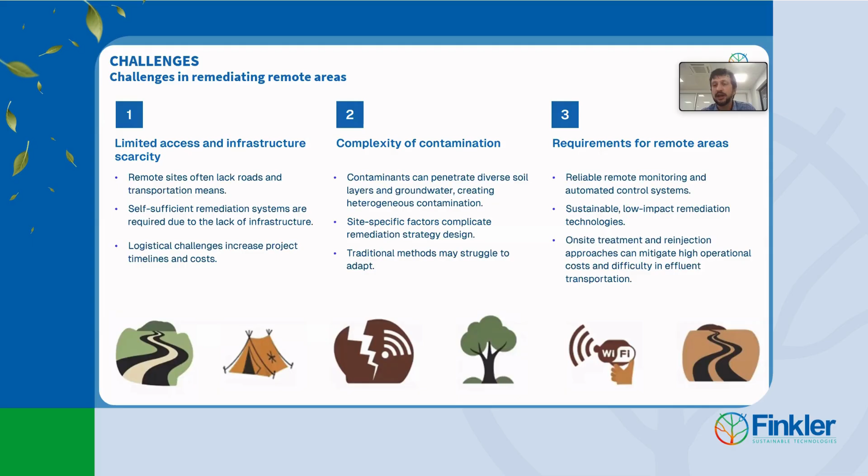Now, every time we head to the field, we have a well-established and technically based field plan. But it's very common for field conditions to demand specific changes or adaptations. Now, in this sort of context, traditional remediation systems require intensive physical presence to enable these specific adjustments. So monitoring and automation, as well as the incorporation of different remediation techniques, can help us optimize the remediation efforts. I know that these aspects are important to all remediation sites, but specifically for remote areas, they have a larger operational and financial impact.

So what are the key factors of our implemented system? Well, automation is a key factor in remote areas. It enables us to continuously operate without having to have a physical presence in the site. It also enables optimized pump performance and can remotely adapt to some extent to changing site conditions in real time.

We also implement solar power with auxiliary power generators. This enables us to have power supply flexibility. Now, the specific capacity of each component will vary according to site specifications. Factors like predicted operation period and distance to resources are taken into account for us to balance implementation efforts and operational optimization. In this sort of context, reduced footprint is also very important, as this reduced footprint will help us reduce the implementation time and costs.

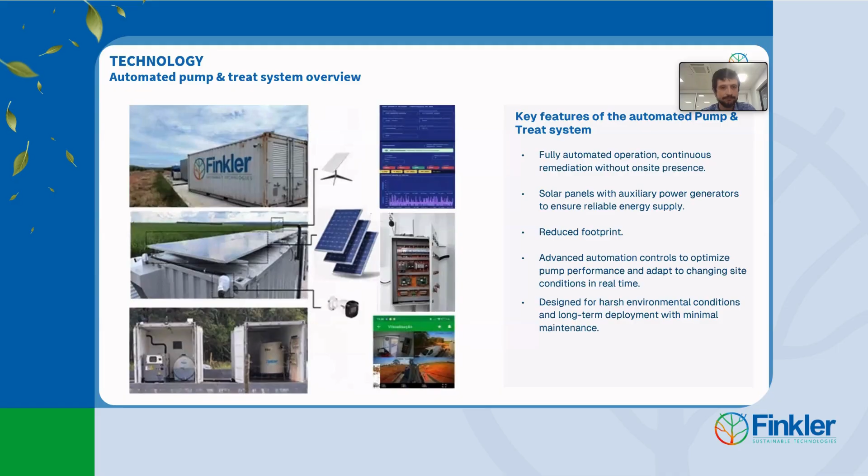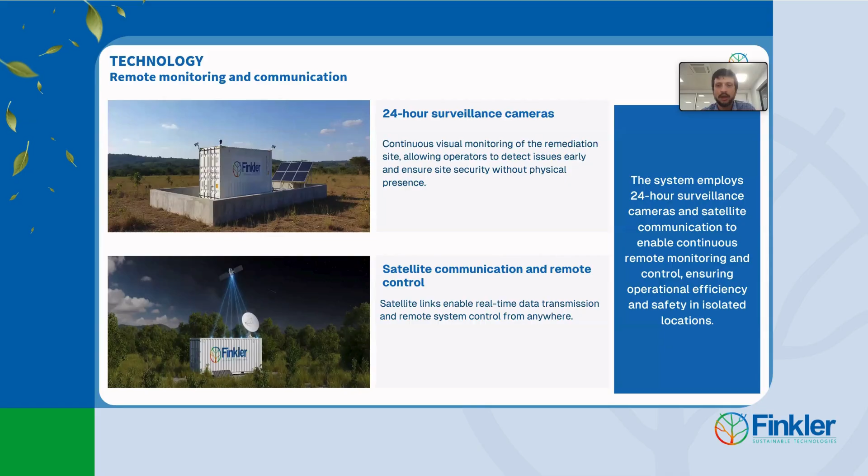Finally, the system that is projected has to be designed to withstand harsh environmental conditions. We often encounter high volumes of rain, elevated temperatures, and high incidence of atmospheric discharges. So in this context, a robust, well-designed system will help us minimize the maintenance requirements. In this sort of project, surveillance cameras and satellite connection must be applied. The cameras enhance security and provide site condition monitoring, and satellite connection enables reliable communication and control, which are utmost requirements for remote operation.

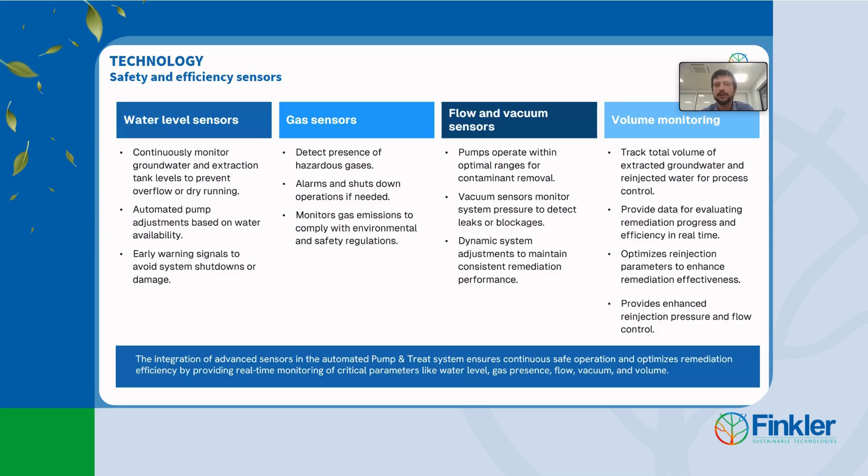So we apply a series of sensors to support these remote operations. We use water level sensors to monitor groundwater and tank levels. This enables us to do pump adjustments and avoid shutdowns and damages. We utilize gas sensors that allow for safe operation and regulatory compliance. We use flow and vacuum sensors, which enable adjustments to maintain optimal pump performance and consistent remediation performance. These sensors also detect potential leaks and blockages within our lines. Finally, volume monitoring provides a progress evaluation and can potentially provide data for reinjection planning.

So in this kind of context, reinjection is a technique that is very important to reduce the movement, the transportation, and the destination of the effluent that is removed. But it presents specific challenges. It must be done very carefully. Pressure and flow rates must be rigorously controlled to prevent uneven flow distribution and formation damage.

Now, there are two main ways we can reinject this effluent. We can do it through a natural flow or through mechanical pumping. Well, natural flow will provide us with a slower flow, and the infiltration path will usually follow a natural site condition, making it difficult to reach specific layers. As for mechanical pumping, it will provide higher control, but if not done properly, it can lead to the creation of preferential paths.

Reinjection also presents the challenge that many times a single extraction point may require several infiltration points to accommodate the removed volume. So site-specific conditions must be considered, and removed fluids may be reinjected partially and sometimes completely. This will very much depend on the reality we find within the field and the specifics of the contamination. So all these factors lead to high operational complexity, and great care must be taken to avoid unwanted contamination movement.

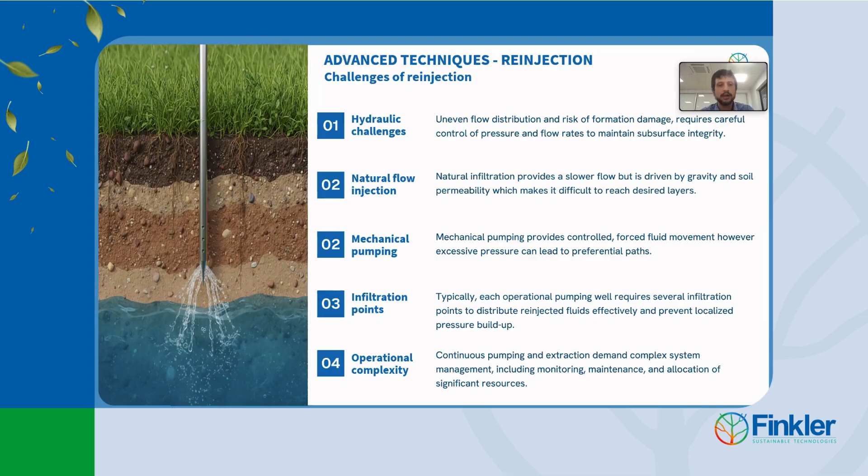So how can we optimize this reinjection? Well, we use forced reinjection. This helps overcome the hydraulic challenges and supports effective distribution. We utilize low pressure and controlled flow, mimicking in situ chemical oxidation techniques. This avoids compromising soil characteristics. We also use the reinjected fluids to establish recirculation by recovery pumping. This can drive contaminant mobilization and enhance the extraction efficiency. All these principles we can apply in either the vadose or the saturated zone.

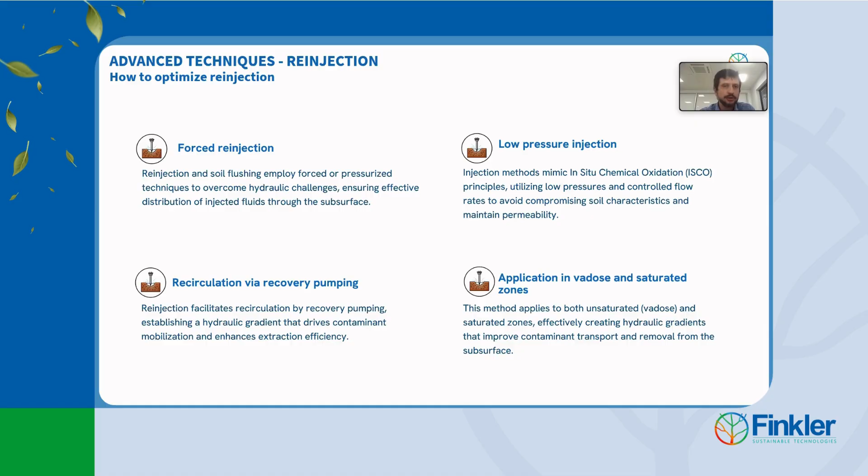So what we found out is that reinjection may be enhanced by combining biosurfactants or bioremediators in the fluids to be reinjected. But in this case, the proper distribution of the points, as well as the injection in the correct layers and the correct depths, are key to success. So optimal solutions vary depending on site characteristics.

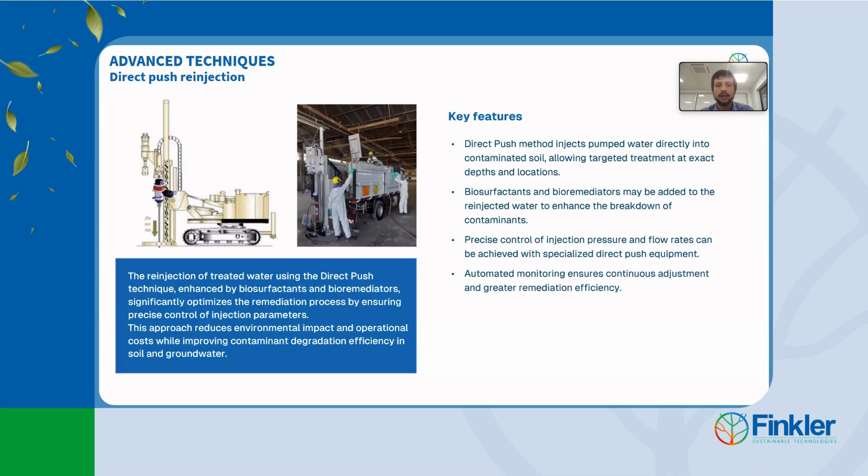We can apply two different formats. In a permanent format, probes can be driven down to the desired positions on the specific and appropriate layers and can sustain continuous reinjection. Alternatively, a batch system can be applied. In this case, effluent storage must be implemented to sustain desired intervals. And then periodically, we can mobilize an injection system that can reinject the stored fluid.

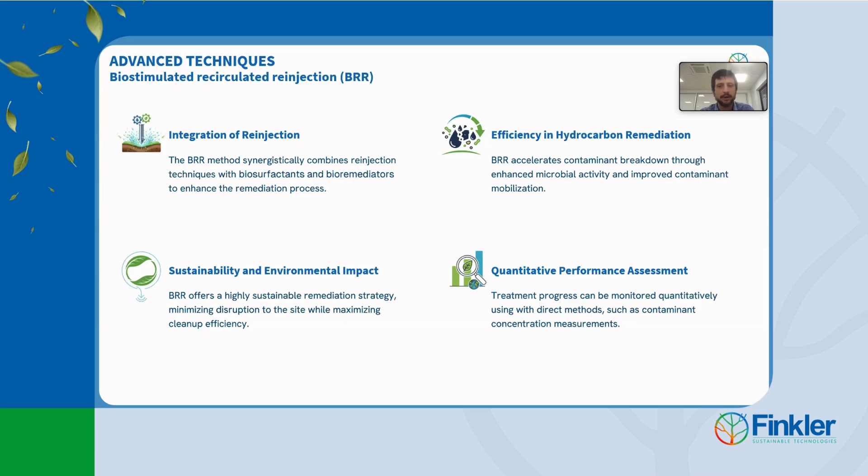So putting all these techniques together, we end up with a biostimulated recirculated reinjection. This combines reinjection with biosurfactants and bioremediation and can accelerate contaminant breakdown and improve contaminant mobilization. This is a sustainable remediation strategy and can maximize efficiency. And all these gains can be monitored through direct measurements of parameters such as contaminant concentrations.

So what are the benefits of this sort of composition? Well, we can reduce or eliminate effluent transportation, and this will lead to operational gains. It can minimize logistical challenges, reduce the reliance on external treatment facilities, and eliminate risks and emissions associated with effluent transportation. We can achieve lower carbon footprints. This is supported by the substitution of fuel by solar energy and the reduction of the requirements for on-site interventions. Additionally, the use of bioremediation may reduce the requirement for the application of chemicals.

Finally, we have significant cost savings. Lower transportation and disposal costs and lower maintenance costs will end up with significant savings. This can be complemented by the reduction of the duration of the project; the better effectiveness of the system will reduce the time of operation that we need to reach our environmental goals. And this will reduce the costs and therefore open up a wider adoption potential.

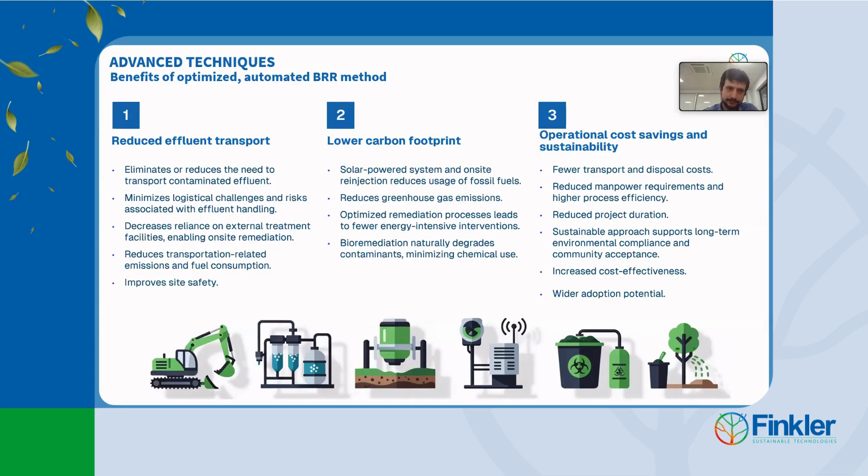So like I said, lower operational costs, lower fuel consumption, reduced downtime, reduced effluent transportation and disposal costs, and reduced operational time to achieve the environmental goals result in substantial reduction in emissions and operational costs. Specific gains vary depending on site factors, the type of contaminant we have, and where each site is located. But the proposed system can lead to an estimated carbon emission reduction of around 40% and operational cost reduction of up to 35%.

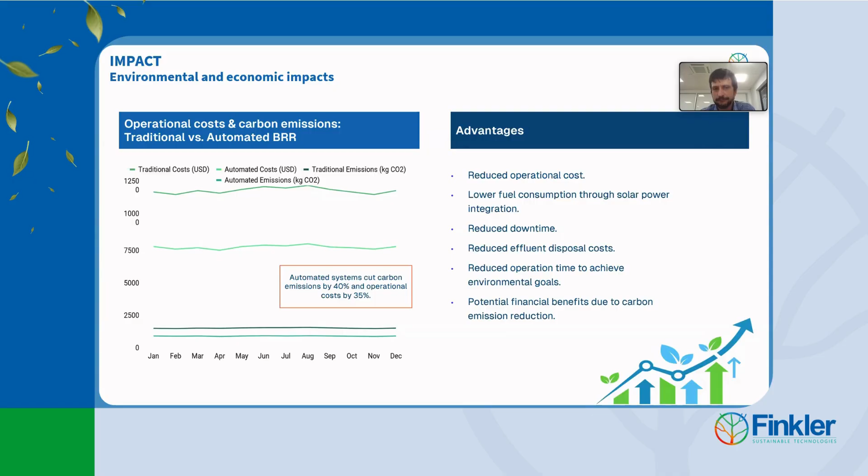So in conclusion, the automated BRR system effectively addresses the unique challenges of remote and isolated areas. This is done through the enhancement of operational safety and efficiency through continuous sensor feedback and dynamic adjustments. The incorporation of remediation via reinjection with biosurfactants and bioremediation maximizes environmental benefits. Remote monitoring capabilities allow for centralized control and minimize the need for on-site personnel. And this is a versatile solution that can be adopted in different field conditions and contexts. It's applicable to global environmental remediation efforts and can support sustainable development goals and environmental preservation worldwide.